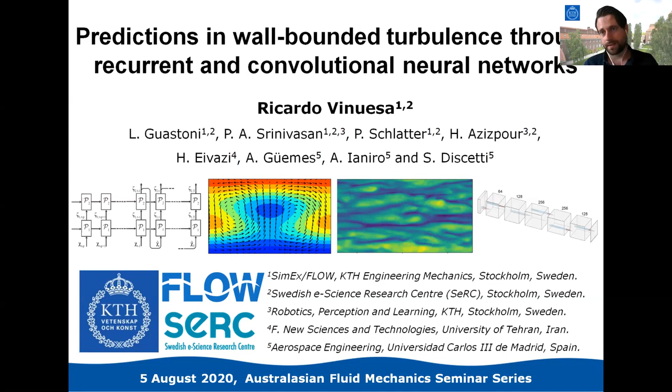I would like to start by acknowledging my many collaborators in this work, in particular Luca Guastoni, a PhD student in our group, who has done a big part of the work I will be presenting today. We also have collaborations with the machine learning group at KTH, with University of Tehran, and with collaborators at Carlos III University in Madrid. This is a collaborative effort, and I will highlight some of the most interesting results to discuss.

The motivation for this work comes from the numerous success stories from machine learning in a wide range of areas. The ImageNet challenge about image classification is quite prominent, where neural networks now have errors of 2% and humans have 5% errors. So we actually make more errors classifying images than neural networks do. Predictive text, finance - there are many applications where machine learning is really helping a lot.

I like this example of one of the first cases where a machine was competing against a human in a task - when the IBM Deep Blue supercomputer defeated the world champion of chess, Garry Kasparov, in 1997. It was really a big accomplishment at the time, and the media captured the importance of the moment. But it turns out it's reasonably easy for a machine to play chess, because chess doesn't have so many options in the end. With some brute force computing, Deep Blue could evaluate a subset of possible moves and select the most adequate ones, and without a sophisticated approach, could defeat Kasparov.

It turns out there are other games like Go, which has recently become very popular thanks to DeepMind, that are significantly more complicated than chess. In Go, if you look at the possible number of moves in a turn, there are many more possible moves, and the typical number of turns a game takes is also much longer. You can define the complexity of a game by the number of moves raised to the power of the turns, and you can see that Go is significantly more complex than chess. So one cannot just evaluate a number of possibilities and pick the best - to play Go, you need some sort of strategic thinking, or intuition about the best way to play.

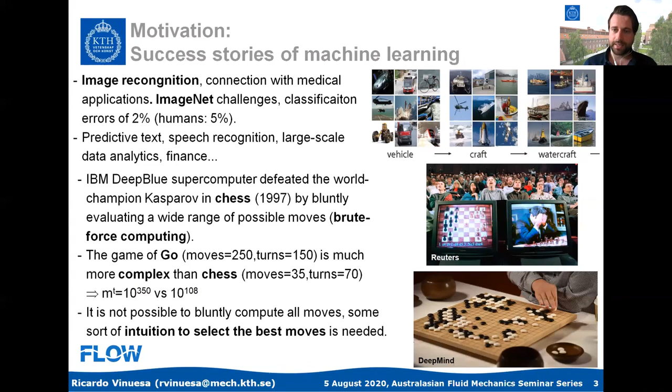This is why this game captured the attention of DeepMind, and they worked on developing different ways of playing Go. They started with an algorithm called AlphaGo, where they showed games of the best human players to this neural network-based algorithm, and it learned from them, becoming extremely good at playing Go - to the point that it was able to defeat Lee Sedol, the world champion of Go, 4-1.

So it really was able to defeat the best human in a game that is actually much more complicated than chess. And then the next level is what they did in this algorithm AlphaGo Zero, where they removed any human knowledge from the table. So essentially they gave this neural network-based algorithm just the games, the rules of the game of Go, and allowed it to play against itself.

It self-improved through playing, just knowing the rules of the game, through reinforcement learning. What's interesting is that in this figure you can see the performance of this network as a function of training time. This horizontal line is the performance of the previous AlphaGo algorithm, and in less than two days, AlphaGo Zero reached superhuman performance. So in less than two days of training, this algorithm, based on knowledge it developed itself with no human input at all, was able to achieve superhuman performance. That was quite an accomplishment as well.

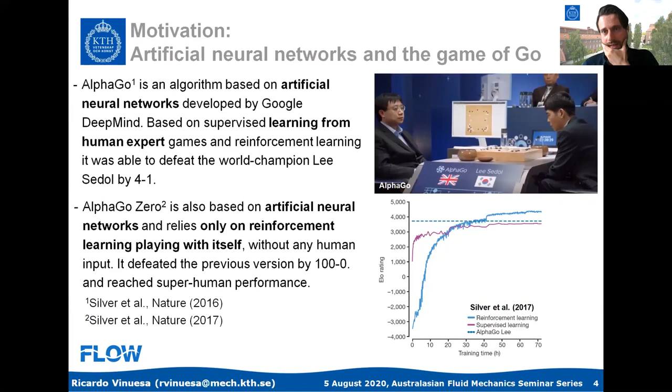We have also looked at a wider range of applications where machine learning or AI, which I will use indistinguishably in this talk, can help. We have a recent review in Nature Communications which you can see here for more details. We looked at the 17 Sustainable Development Goals from the United Nations, and we looked for published evidence on how AI could impact positively or negatively each of these goals, which are also split into 169 targets — going from sustainable cities to climate change to no poverty, all these sustainability targets for the 2030 agenda. What we found is that 79% of the targets could be positively affected by AI, and only 35% could be negatively affected. So in principle there is a quite positive impact of AI on a wide range of applications. Of course one needs to be careful also with the negative ones, but it seems there are many areas where AI can really help.

Now going to our topic today, machine learning applied to fluid mechanics. There are many areas where the feasibility and potential of AI has been assessed in fluid mechanics, starting with a seminal paper by Milano and Koumoutsakos, who used neural networks to model the near-wall region of turbulent channels. This was almost 20 years ago. More recently there has been an exponential increase of machine learning papers looking at fluid mechanics applications.

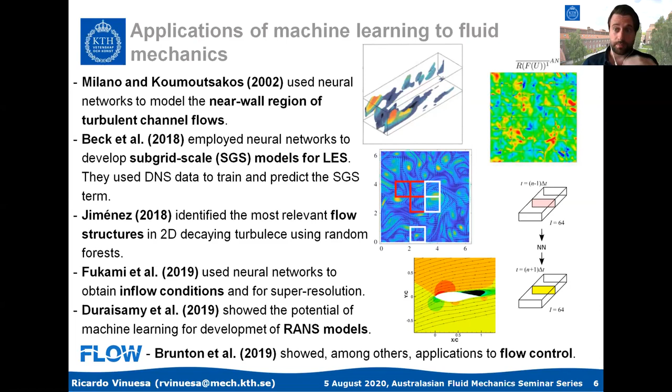So there are many areas within fluid mechanics where machine learning can help, and that's what motivated us to look at what could be done in the context of turbulence. We looked at two main sections, so I'm going to split today's talk into two parts. First we'll focus on temporal predictions, how to advance the flow in time using neural networks, and for that we'll use mostly recurrent neural networks. In the second part I'll talk about spatial predictions, basically non-intrusive sensing, using convolutional neural networks. Let me start with the first part.

This is about temporal predictions, and to do that we start with a simple model of the near-wall cycle of turbulence. This model, developed by Moehlis and others, is basically nine spatial modes that are combined to build the instantaneous flow field. The point is that we need to be able to predict and understand the evolution of the temporal coefficients of these spatial modes. This is a sinusoidally forced flow, so the laminar profile is a sine function, and the different modes represent the streaks, the streamwise vortices, their instabilities and coupling.

Because this is a very cheap model, a system of ODEs, we can produce a lot of data for training, testing, and validating. We produce over 10,000 data sets of 4,000 time units each, using the approach described by Kim. We perturb the fourth coefficient in order to vary the initial condition and produce a sufficiently complete set of conditions, and we only consider data sets that were fully turbulent in the whole range.

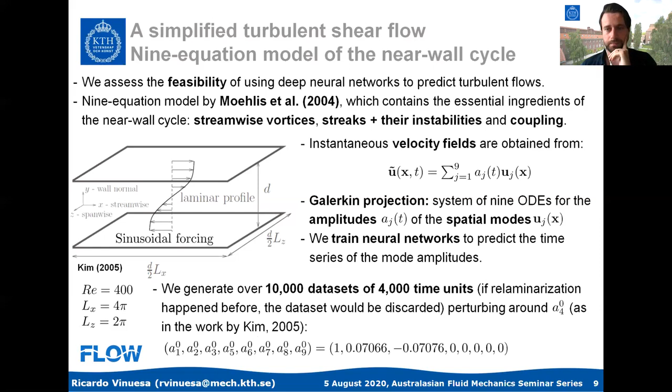So we don't look at relaminarization, we just focus on the turbulence. And this is an idea of how the flow looks like.

All the details of this study are found in this work by Srinivasan and others. This was in Physical Review of Fluids last year, so everything can be checked in more detail here.

What I'm showing is a sample evolution of the 9 temporal coefficients. What you can see is that at some point in this series, the flow relaminarizes. That means A1 goes to 1 and the other coefficients go to 0. We would not consider this series for the training, we would only consider a series that is fully turbulent.

But what you can see in the turbulent region is that the flow looks like it has the elements of the near wall cycle. So you have the streamwise vortices, the streaks, you have the spanwise variation of those streaks. So in principle, this is a model that can help us reproduce some of the behavior in the near wall cycle of turbulence.

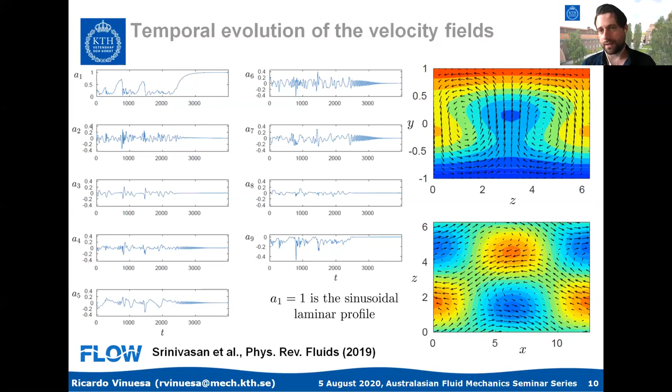And to perform the predictions, we start with the easiest type of neural network. This is the so-called multi-layer perceptron, the MLP, which is a neural network that is fully connected in all the layers. The interesting thing of this network is that it does only point predictions. It does not take into account any temporal dynamics in the data, and is the baseline performance basically.

So when one is looking at machine learning models, the MLP is the basic level of performance that one can achieve, and then any modifications on top of that give you the level of improvement that one can get, essentially.

So this is how an MLP looks like. On the left, you have the input vector, this is the data that you use to perform the predictions. In the middle, you have L hidden layers, which contain the coefficients to perform the predictions we want to do. The output vector is here on the right, which in our case has dimension M equal to 9, because we're predicting 9 coefficients.

The dimension of the input depends on how many steps we take for the predictions. So if we take P previous steps, then the dimension of the input will be 9P, the 9 coefficients multiplied by the number of steps. So usually this input vector will be much larger than the output.

And if now we zoom in a little bit into these neurons to see what's inside, what we see is that in the end, this is just a matrix vector multiplication plus some non-linearity. This matrix vector multiplication, the array that results in this layer, is just the result of multiplying all the weights, which is a matrix, by the input plus the biases. So it all boils down to fitting or adjusting the values of the weight matrices and the biases.

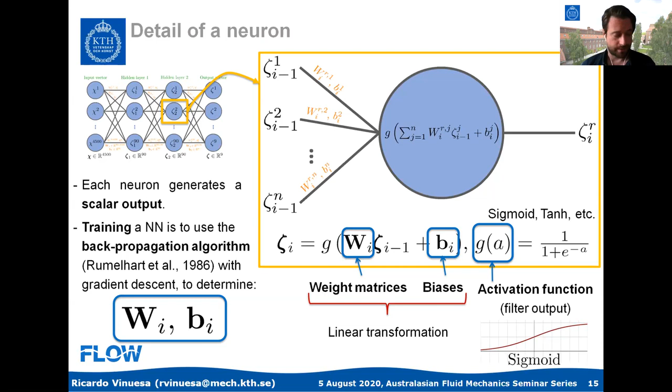So a little bit about training. Typically what we do is split the training data set, so we get 80% for training and 20% for validation. What is training and what is validation?

That's how well you are predicting data that you have not seen during the training. Typically this is going to be larger because you're not going to fit so well the data that you have not seen, but if everything goes well, this should be decreasing as well, because the more you train, the better you're able to generalize the training information.

What can happen is that the training loss goes down, but the validation loss goes up at some point. This is called overfitting, which means you are fitting too well the data you are given, but you're not able to generalize. That means you need more training data so the network can see a wider variety of cases and generalize better.

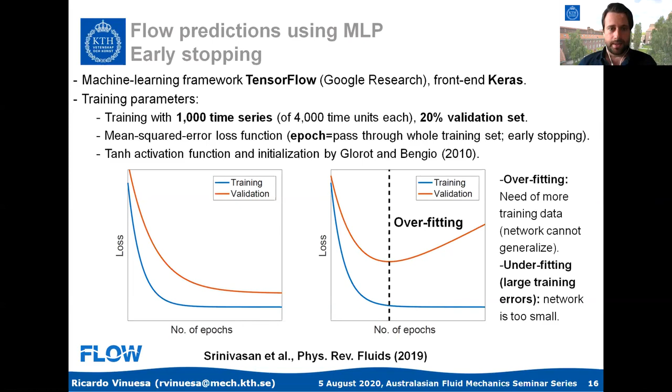This very first prediction performed with the MLP gives us an idea of how much one needs to actually get results. We consider a network with 3 hidden layers and 90 neurons per layer. Keep in mind that the MLP, as I mentioned at the beginning, does point predictions, so it does not know how the data is organized in time. We're using P equals 500 previous steps to perform the prediction of one single step.

Because I have 9 coefficients, I'm using 4,500 data points to only predict 9. This is because this network does not know how the data is organized in time - it just knows that you have many points to predict the next one. So that gives us an idea of how this doesn't seem very efficient. You should incorporate the information of the time dynamics, and that will come later.

But even without knowing about the temporal dynamics, the instantaneous flow field looks more or less like what you get in the reference. It seems that the span-wise movement of the streaks is perhaps not as close as what you had in the reference, but the flow kind of looks a bit like what it should.

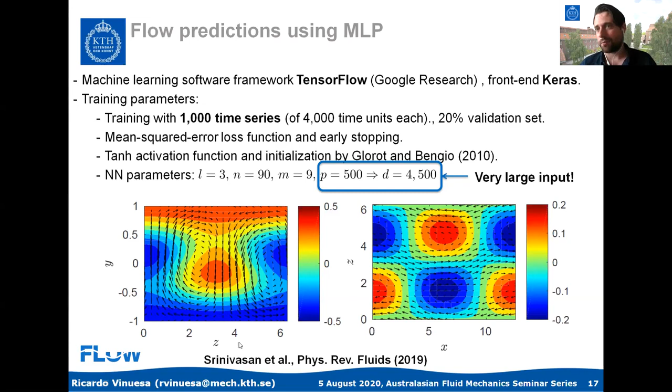If one looks at the turbulence statistics - the mean velocity profile, the fluctuations, and the Reynolds shear stress - you find quite good agreement with the mean, but significant deviations in the Reynolds shear stress. You get 36% error in the fluctuations and in the shear stress. So clearly there is room for improvement in this type of prediction.

What we did was play a little bit with the architecture of the network. We consider a much bigger network here, with 5 hidden layers and also 90 neurons per layer. And we can see that we can improve.

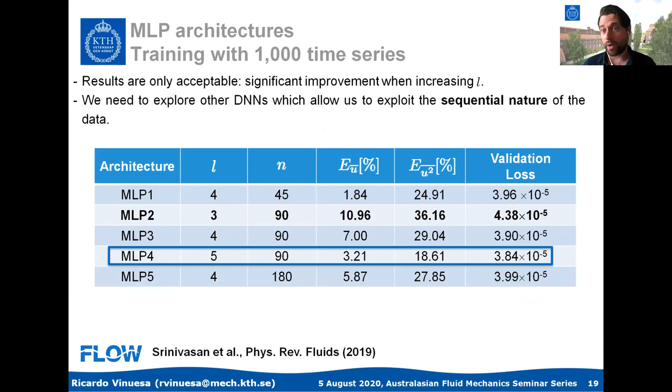This would be the error in the mean, and this would be the error in the fluctuations. We can improve the error in the mean, but we still have quite large errors in the fluctuations - 20% error. This gives us an idea of how far one can go with MLPs. We can get decent predictions, but we're still quite far from getting very good agreement with the reference.

The next level of sophistication would be what is called the recurrent neural network. This is a network that essentially incorporates the temporal dependencies in the input data, and that allows us to understand a little bit how the data is organized. This is a schematic representation of an RNN, a recurrent neural network, all described in the proceedings paper by Guastoni and others.

And what you see on the bottom is the input vector, the input data that we're having. And here on the top, I'm having the output of this current step. You can see that because of how the data is organized, the temporal dependencies are taken care of.

How are they accounted for? The key is what you see here. There is a recurrent connection in this particular place, which gives us the information of how the temporal dynamics are being accounted for. So if we look at this particular neuron, we see from the bottom we get the input of the current step, and from the side you get the information from the same layer at the previous step. So this recurrent connection is what will allow us to get a very good representation of these temporal sequences. You get present information and past information as well.

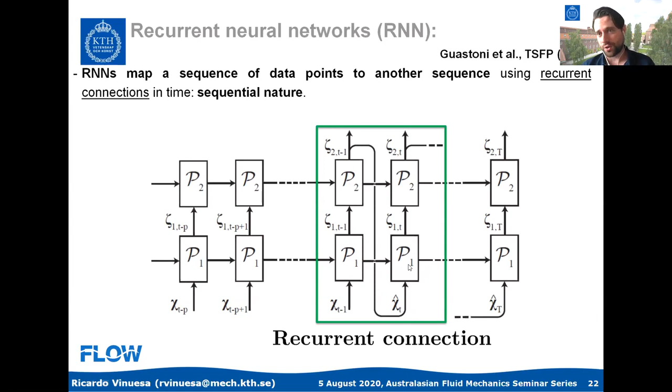Turns out that if we zoom into this neuron from the recurrent neural network, it's quite difficult to train recurrent neural networks because very quickly you get the problem of vanishing gradients. Basically your gradients go very close to zero, and then there is no possibility to train anymore.

One quite popular solution to the vanishing gradients problem is what is called the LSTM network, long short-term memory network, which is very famous because it's widely used in speech recognition, in text, the autocomplete features of your phone use LSTM networks. So if you're getting the wrong word when you're writing a text, then you need to train your network more, right? It's not getting the word that you're thinking.

It is all based on the training data and on how the temporal dependencies of that data are being constructed. So the autocomplete is trying to predict what is the next word that you're going to write. Without going too much into details, if you're interested, we can discuss it a bit more later.

This LSTM network has a quite sophisticated gating mechanism. What does that mean? Through these gates, forget gate, input gate, output gate, it tries to understand how important is the past information and how important is the present information. Through this sequence, it is giving a certain weight to the old information and a certain weight to the information that comes from this current step.

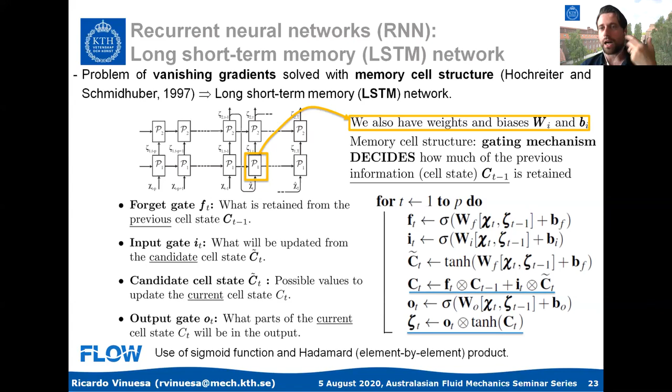By doing that, it can exploit the temporal dependencies in the data, and it can learn from those dependencies how the data is structured in time. In the end, we're also training weights and biases, so you can see different weights and biases in all these different gates. But what we are doing is a very similar thing, just organizing the data in time, so the network knows this input comes after this one, and this is the other input from the next step. Then it can really understand how the data is organized in time.

What we do first is an exploration of the architecture of this network. We change the number of layers, we change the length of the sequences that we are predicting. Here I'm showing the results, and I'm going to walk you through how it performs.

In the end, the idea is that with a much smaller input, here we only use 10 previous steps, we can get very good results. Remember that before we needed 500 steps to make one prediction, and now we only need 10 steps, because by knowing how the data is organized in time, you don't need so much input information to get a good prediction.

So if we compare this LSTM1 architecture, it has only one hidden layer. What I'm showing here is how much training data I use. If I compare the results with 1,000 training data sets, the same that I had for the MLP, we can see that we can reduce the error in the fluctuations from 20% down to 3%. So we can really improve significantly.

And if we increase the amount of training data from 1,000 to 10,000, then we can further reduce the errors. We can actually get errors in the mean of 0.5% and errors in the fluctuations of 2.5%, which is actually quite good. By adding a second hidden layer, we can further improve the predictions.

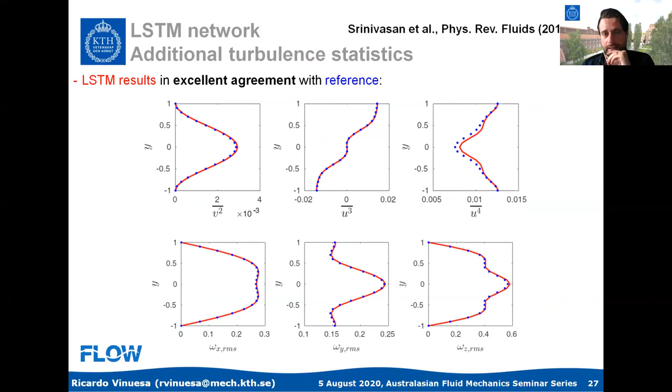Interestingly, if we go to even more complicated statistics, we also see that the higher order terms, the skewness and flatness, are in excellent agreement, and the vorticity fluctuations are very well predicted. So we can predict extremely well the turbulence statistics of this temporally evolving system. Again, this is not canonical turbulence, just a low order model of the near-wall cycle, but the temporal dynamics is in principle quite well represented.

This is because this near-wall model is a chaotic system. Of course, the network predicts the flow very well, but it's not exact. It has a small error, and that small error is sufficient to shift the prediction to another trajectory, so you're not getting the same prediction.

On the other hand, we are currently developing some work in the context of the Koopman operator to improve the short-term predictions. There are ways of keeping that short-term prediction better for longer, but of course any small error will eventually push you to another trajectory.

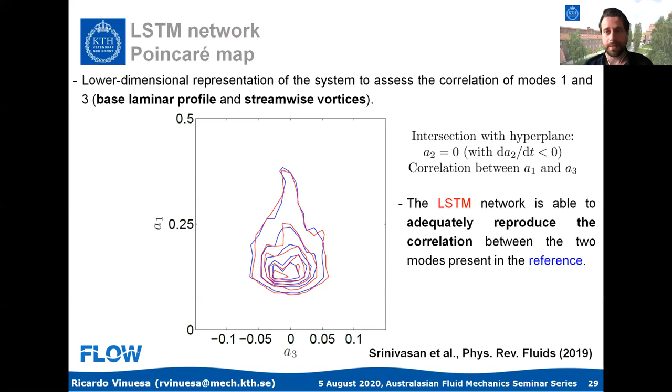But LSTM networks are a valid possibility and a quite robust possibility to predict the temporal dynamics of these, in principle simplified, although quite realistic, turbulent flows, basically.

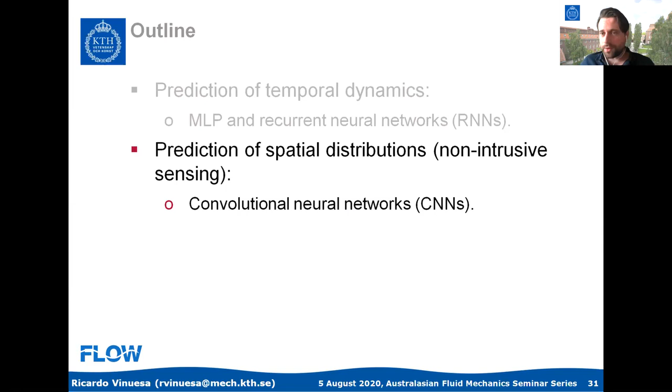To do that, we're going to use what is called convolutional neural networks. Let me explain a little bit more why this is a good choice to use this type of network.

This type of problem, measuring at the wall for example and predicting the flow farther away from it, has been investigated before by Suzuki and Hasegawa and by Encinar and others, through linear methods, basically linear stochastic estimation. So you establish a linear relationship between the quantity measured at the wall and the quantity that we want to predict.

More recently, we have a paper in JFM, Sasaki and others, where we looked at transfer functions, basically convolutions, where we consider both linear and non-linear transfer functions, and we saw that the non-linear ones perform better. So what you see here is the streamwise velocity fluctuations at y plus 15 in a turbulent boundary layer.

And here is the linear prediction. You can see that the linear prediction attenuates the fluctuations in some places, and in other regions it overestimates the fluctuations. So clearly there is something missing if you just do only a linear prediction.

As we know, scale interactions in turbulence have a linear component, which has to do with the superposition of the larger scales on the flow closer to the wall. But there is also a nonlinear component, which is the modulation. And if you have a linear prediction method, then you're going to miss all the nonlinear interactions.

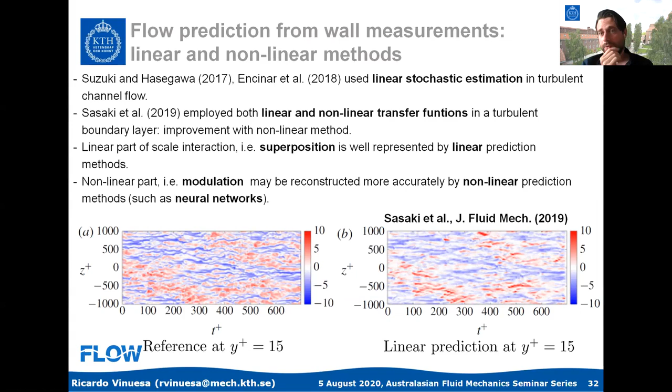So in principle, it is reasonable to think that a nonlinear method will perform better. And as I mentioned in the first part of the seminar, neural networks are able to introduce nonlinearity in the predictions through this activation function. So, given that we have enough training data, we can perform nonlinear predictions by using neural networks.

And we're going to consider this example: a turbulent open channel flow. The reason why we chose an open channel is because in a full channel, you have interactions of the larger scales from one wall on another, as shown by Lozano Duran and Jimenez, and we want to simplify the dynamics a little bit.

So if we only have one wall and then a symmetry condition on the top, then in principle we don't have that interaction between walls. So that's a little bit simpler for our network to learn.

We consider the Fourier-Chebyshev code SIMSON developed at KTH to perform DNS, direct numerical simulation. Here I'm going to start with a friction Reynolds number of 180, but later I will show you results at 550, and I will also show you results in a bigger domain. This is the first assessment.

All the details of this are in this proceedings paper by Guastoni and others. This was developed in the summer workshop in Madrid by Jimenez, and then it was later developed a bit more to include more cases. So all the details are in this conference proceeding.

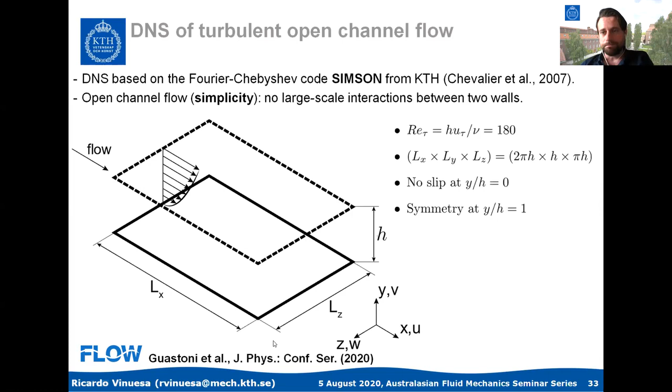So first, let me briefly explain why we think that convolutional networks are suitable for this problem. The first half of the seminar was based on fully connected layers, networks where each neuron in one layer has a connection with all the neurons in the next one, and it's easy to see that that gives us a lot of parameters to train.

All of these connections have a weight and a bias term, and images well, images are pixels, right? That's a lot. If you start to have high resolution images, you have a lot of data. And if you start to have many layers, then the amount of parameters increases exponentially.

So that's not feasible. Fully connected networks for computer vision are usually not a good idea, at least fully connected layers all the way. Some connected layers can help at the end, but in principle, having all the layers fully connected will be problematic if we consider computer vision problems.

On the other hand, there is a tool that has received quite some attention recently, which is the use of convolutional layers. These convolutional layers are based on what is called a kernel.

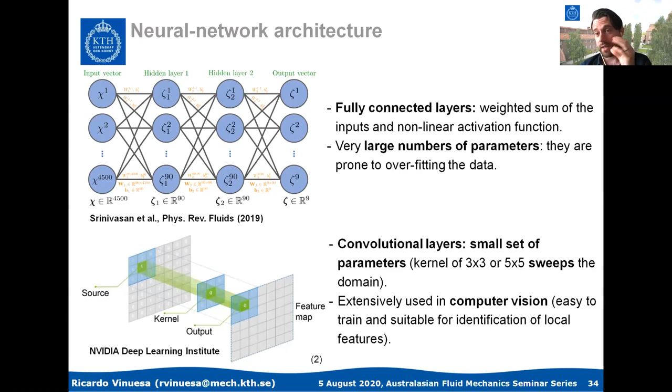This is a 2D window that can be 3 by 3 or 5 by 5, and this little window sweeps through the image. As I'll explain, all the information from this window results in one data point in the output. This produces significantly fewer parameters than a fully connected layer, and it's a quite suitable tool for analyzing the structures of images. So convolutional networks are extremely popular in computer vision because they're cheaper and easier to train, but they also perform better.

I'm going to understand a little bit what these convolutions are doing. I'll discuss very briefly something that's probably basic for most of you, just to quickly look at convolutions in image processing. So essentially, how does this work? What is this convolution operation?

If you have an original, starting image F, which is a set of pixels, a black and white image with only one input channel, one defines a convolution filter, or kernel first, because the 2D function is a kernel. When we get more kernels stacked on top of each other, then we get a filter. And the result of the convolution is what is called the filtered image.

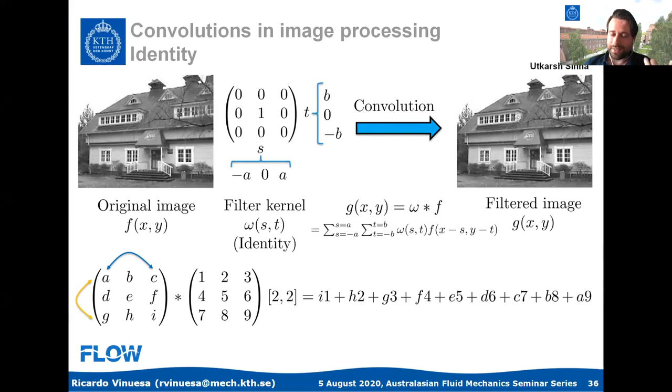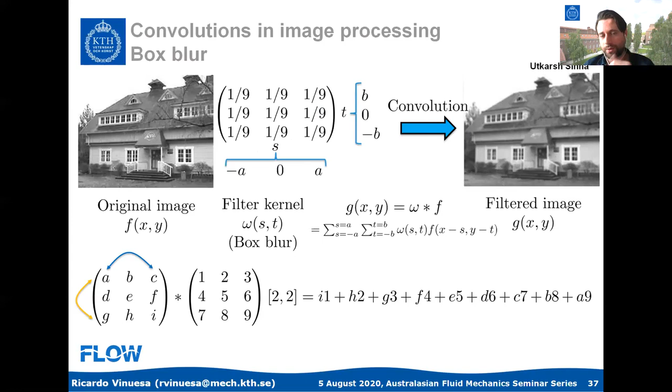So it could be that the convolutional network is picking up edges, picking up blobs of high fluctuation, picking up streaky structures - clearly things that are found in turbulent flows. So those spatial features identified in images is exactly what we're able to pick up when looking at the fields in turbulence.

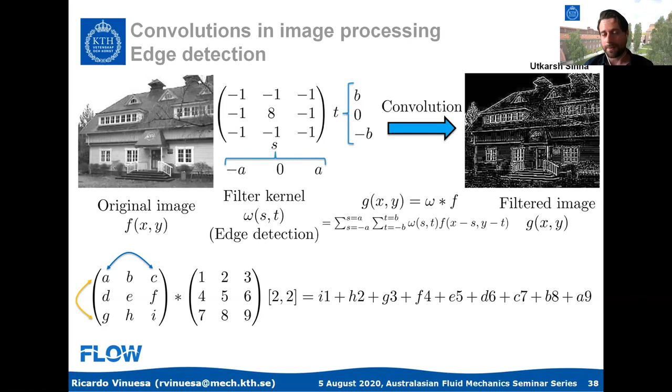If one applies the 2D kernels on 3 input channels, one obtains what is called a filter, and a filter of 3 by 5 by 5 would be applied to this input as follows: I apply the first kernel to the first input channel, the second one to the second channel, the third one to the third channel, and then add everything up at the end. So it's very easy to apply filters when you have multiple input channels.

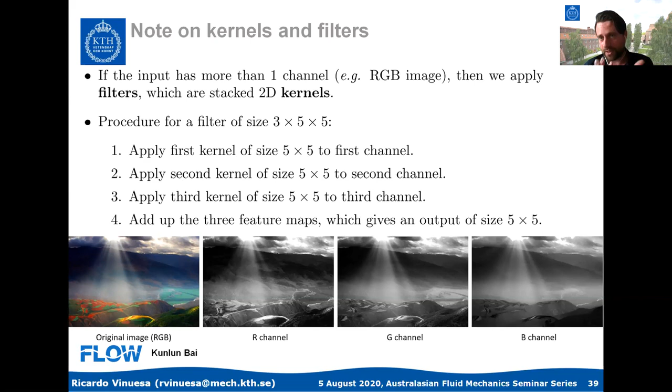The reason I'm doing that is that when I go to turbulence, it will be interesting to have several input channels, not only one piece of information to predict, but more than one piece of information.

Now, enough about images, let's go back to turbulence. What are we trying to do? We're using quantities measured at the wall, in this case the streamwise and spanwise wall shear stress components, so we have 2 input channels. We're going to predict, farther from the wall, the streamwise velocity fluctuations at the same instant. So we're using information from the wall to predict information far away from the wall.

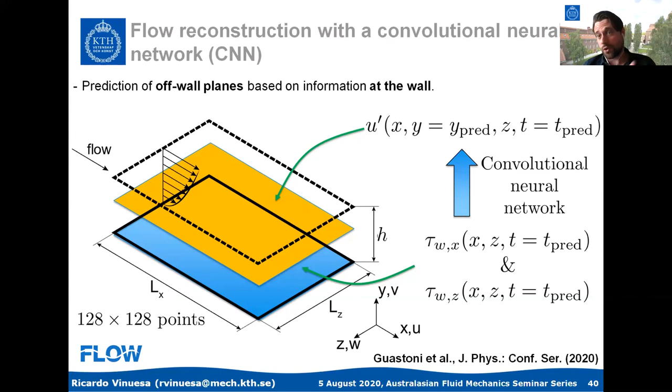Because we have 2 input channels, we have to account for this procedure when you have multiple input channels. All the information about this network and how everything is designed is described in these proceedings, so you can get all the information there.

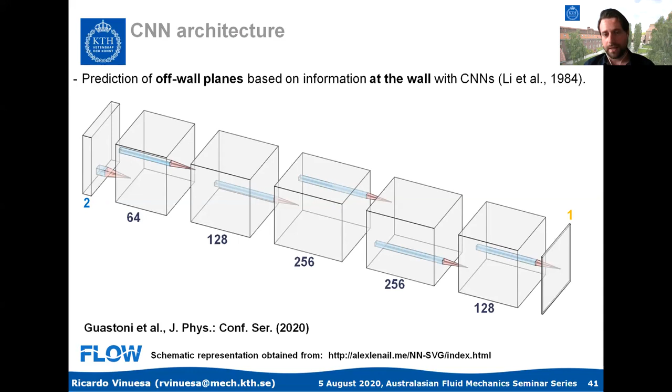This is the schematic representation of our convolutional network, made up of different convolution operations. We start on the left with the input layer that has a depth of 2, since I'm using 2 wall shear stress components, so that's 2 channels. The output on the right has a depth of 1, because I'm predicting only one field, the streamwise velocity fluctuation field. In the middle we have what are called the convolutional layers.

I'm considering as an activation function the ReLU, the rectified linear unit, which is a very simple activation function but very powerful in computer vision. And I'm having an input of 128 square points, which is the resolution of the plane that I'm considering.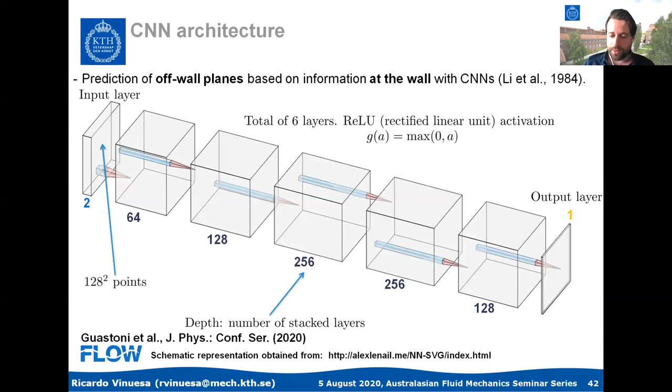So how does this work? In practice, in my first layer I have a filter of size 2 times 5 times 5, so the 2D window would be 5 by 5, meaning we have 25 points to produce the output of 1 point, and that gives me only 50 parameters.

To give you some perspective, if I would do this with a fully connected network, I would need 128 squared times 2, so more than 32,000 parameters. So you can really see there is a huge decrease in the amount of parameters, and why this is helpful for computer vision.

When I apply this filter, I apply it a total of 64 times, stacking all the feature maps, so I get 64 planes with features. What is a feature? It can be an edge, a certain characteristic of the image that has been picked up by the filter.

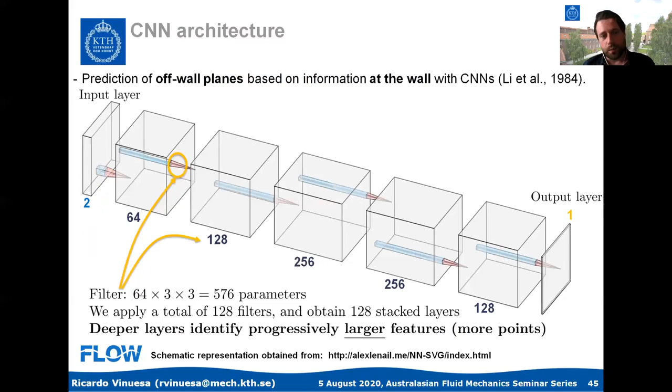What's interesting is that as I go deeper into the network, those features get combined into larger things. The first layers look at local information, very small things, but as you go deeper into the network, the outputs receive information from more and more points.

So they're building up towards larger structures as you go deeper. This is quite cool, because there's a hierarchical distribution of those features, which is something we observe in turbulence all the time, that hierarchical setup of the scales being identified. This is why convolutional networks are helpful in image processing and computer vision, because we're able to exploit the hierarchical structure of the data with far fewer parameters.

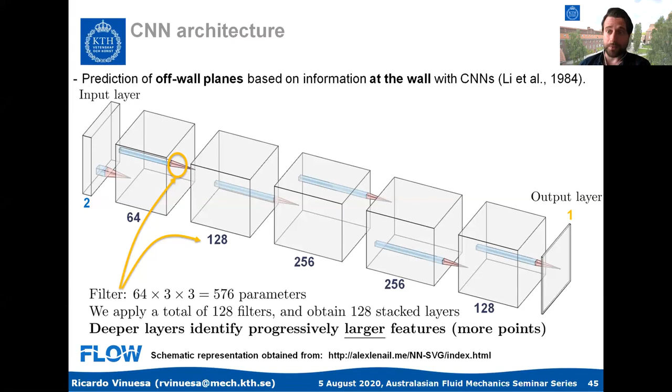This is what I mentioned at the beginning. You can have, at the end, a fully connected layer, so you get a global output, for example telling you this is a car. But you can also have fully convolutional layers all the way, which means at the end I don't get one single output like 'this is a car' or 'this is a cat.' Instead I get a field identifying what is a car, what is a cat, what is the road, and so on. This is obtained when we have fully convolutional layers all the way.

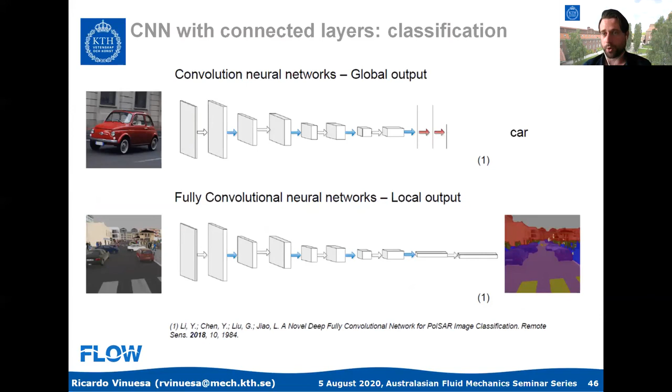And this is the approach we're going to take here, because we want our output to be another field, like the input.

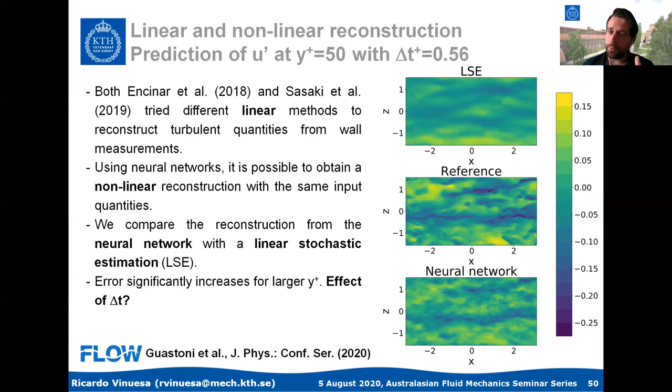The predictions are not as good, of course, because the data is less correlated. One way to improve the results far from the wall is to increase the time step between samples. Farther away from the wall, the scales are much slower, so the samples are more correlated and you get less information from them. By increasing the time step between samples, we effectively get more information, and you can see that the validation loss is lower and the field is in better agreement with the reference.

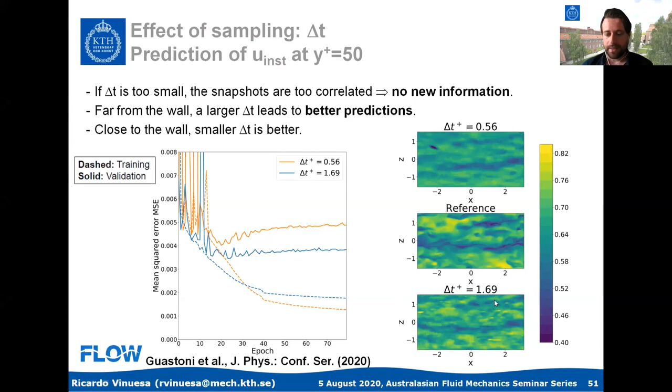Looking at the turbulence statistics, the orange triangles show the mean flow and streamwise velocity fluctuations. Close to the wall, the agreement is excellent, and as we move farther from the wall, we start to see higher deviations from the data. If we increase the time step between samples, we don't see a difference close to the wall, but far away we improve because we have less correlated samples, giving us more information to train our network. The linear stochastic estimation, the linear prediction, is the worst, because it only captures linear interactions between input and output.

Looking at the percentage errors, at the near wall peak we get less than 3% error with the network and 12% error with the LSE. Farther from the wall, we get 30% error with the network. This is something we've been able to improve a bit more in our more recent study.

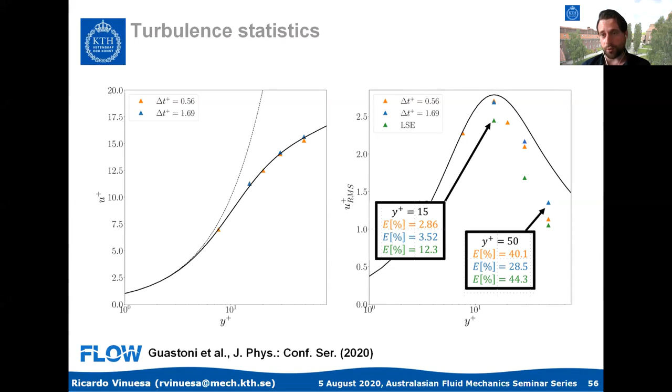Let me dive into it. We have now extended this work to a friction Reynolds number of 550. We have increased the amount of inputs, now also considering the pressure. So we consider the two wall shear stress components and the pressure as inputs, and the output is the three velocity fluctuations, not just the streamwise component.

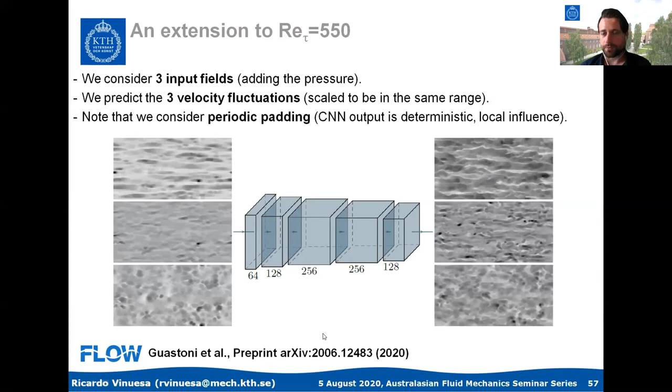We scale the inputs so they are in the same range, and we also apply periodic padding to the input so we can exploit the periodicity in the underlying training data. By the way, all of this is available in a recent preprint by Guastoni and others, where all the details of our setup are discussed. Feel free to reach out if you're interested in that.

In this work, we introduce another approach, also discussed in a paper in Physics of Fluids by Güemes and others: instead of predicting just the flow, we perform a proper orthogonal decomposition, POD, and then predict the temporal coefficients of the POD modes. By doing this, we encode some of the physical behavior of the flow through the POD modes, and then we only need to predict the temporal dynamics. This is similar to what we did at the beginning with the Moehlis model.

Here you see how we do it. We take the domain, decompose it into smaller subdomains, and perform the POD in each of these squares. The reason is that all scales larger than the domain size get lumped into the first POD mode, meaning we can reconstruct the signal with fewer modes. This is less work for our network, since we only need to predict fewer mode coefficients. This is how the data is organized when performing these predictions based on POD modes.

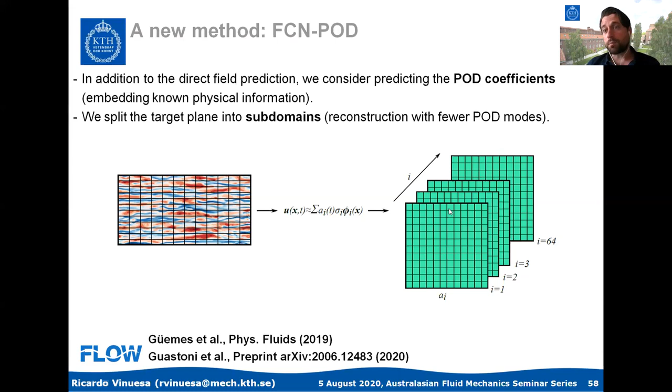So this is a comparison of results, all at a friction Reynolds number of 550. On the third row we have the reference DNS. On the bottom row, the first column is y plus 15, and the second column is y plus 100. The FCN, the fully convolutional network, based on predicting the full field, is in excellent agreement with the data, as before. It gets worse when compared farther away from the wall. But the convolutional network with POD actually performs better when we are farther away from the wall.

Why is that? Well, it kind of makes sense because close to the wall, it is quite easy for the fully convolutional network to just reproduce the full signal. But when you go farther away from it, it is more useful for producing training data to just encapsulate all the spatial distributions into the POD modes and train to learn the temporal dynamics. So the message is: close to the wall, the network that reproduces the whole field performs better.

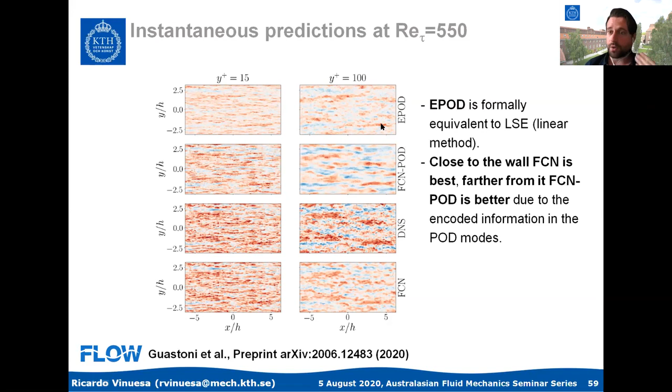Far away from the wall, the network that predicts just the temporal coefficients of the POD modes performs better. And here, as a reference, I'm showing a linear prediction, in this case through extended POD, but that's formally equivalent to linear stochastic estimation, and the results are as before. So basically, we get an attenuation of the fluctuations when we only consider a linear prediction of the flow.

Here I'm showing the predictions of the streamwise velocity fluctuations, as well as the wall-normal and the spanwise. The triangles are the convolutional network, so basically predicting the full signal. The blue circles are the predictions through convolutional network of the POD modes, and the green squares are the linear prediction. So what we can see is actually consistent with what we saw before: the extended POD, the linear method, performs worse.

Far away from the wall, all the methods start to exhibit discrepancies. And what we see here is that in the case that is farthest from the wall, the network based on POD is a bit better than the one based on the fully convolutional network.

And you can see here the error levels. We actually get quite good predictions. Close to the near wall peak, we make less than 1% error in its prediction, so it's essentially very well predicted. Far away from the wall, at y plus 100, we actually get only 26% error in the streamwise velocity fluctuations, which is a quite good accomplishment, keeping in mind that we're very far away from the wall.

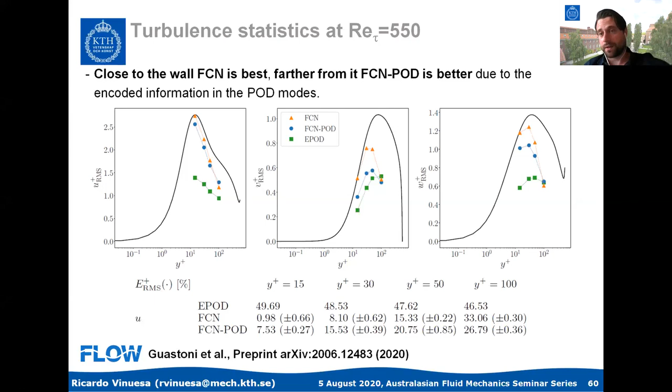And then just to conclude, I would like to briefly mention a couple of examples of something that is very trendy in machine learning, which is transfer learning. I think that there is quite some potential in this approach. It's basically the idea of transferring the knowledge learned by one network to another one, so we don't have to redo the training all again. And of course, in the context of efficiency and code development in a practical way, this is very practical.

So if we first look at the 180 case, what I'm showing is that it is possible to freeze the 3 first layers from the network trained to predict at y plus 15. And if we want to use this same network to predict at y plus 50, so farther away, I only train the 3 last layers. So basically, I freeze the first layers, the ones that are looking at smaller features, and the layers later on, the ones that look at larger features, those are left free.

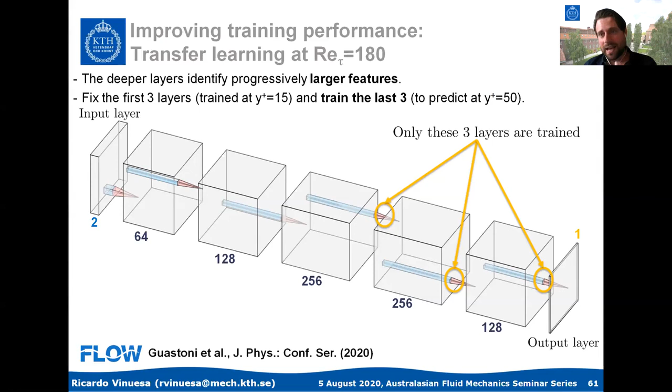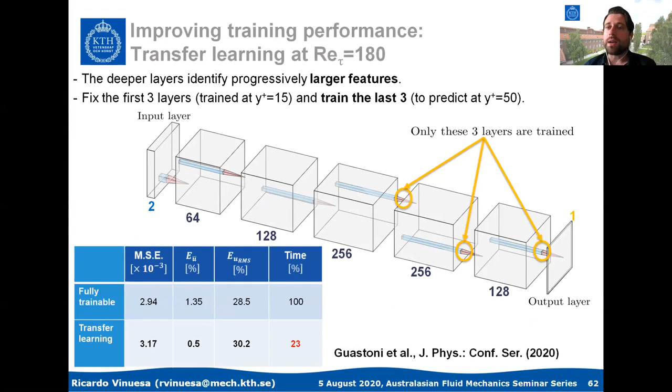And of course, that kind of makes sense because I would expect the smaller scales to be more or less similar at 15 and 50 plus units, and of course the larger scales to be different. So I can exploit what I learned at y plus 15, and I don't need to learn it again for y plus 50. The results show that we get very similar results in terms of mean flow and fluctuations, and we save more than a factor of 3 in terms of training time, in terms of computer time. So actually, this really helps me to transfer the knowledge and train more efficiently the network at y plus 50.

And this, I would say, is maybe the most remarkable result: we are able to transfer the knowledge learned at 180 to 550. This is, of course, only one example of how to do this transfer learning. There are many applications, and we're looking at some of them right now, of how this can be done, but it's actually something quite promising.

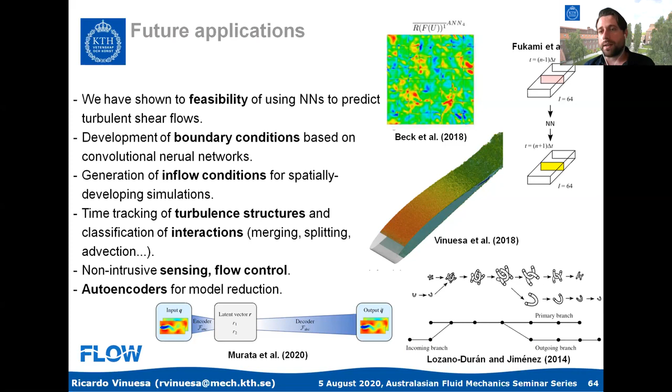And then an area which has received some attention recently in the group of Koji Fukagata is the use of autoencoders for model reduction. I really think this type of application will see a lot of potential in the coming years, basically performing nonlinear modal decompositions through autoencoders, which are showing quite interesting applications.

And with that, this is a summary of my conclusions and results, and some areas for improvement. I would like to thank you very much for your attention, and we have some minutes left for taking your questions. Thank you.

Thank you very much, and on behalf of everybody—hopefully everyone's clapping. So some virtual claps from Julio. Yes, it's very easy to confuse the virtual claps of people raising their hand.

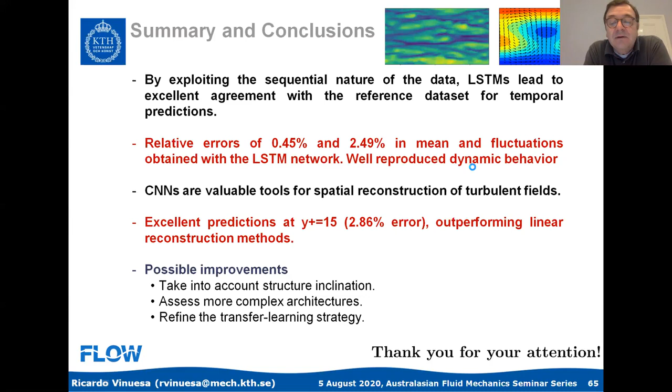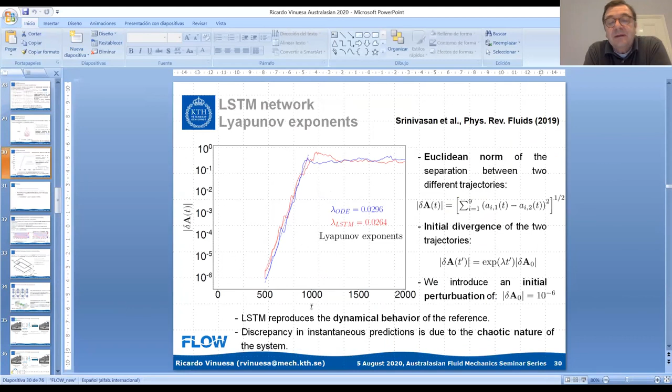It introduces quite a few concepts that are working. If you go to page 30 of your slides, I saw something reminiscent of transition, which is where I want to take you. This reminds me, conceptually, of a very nice prediction of linear behavior, which is a simple thing to do. The trouble is that some of us would argue that transition is much more difficult than turbulence, in the sense that as this principal linear mode grows, other modes will come up non-linearly, and the non-linearity, which modes and how strong they are, will depend on the initial amplitude of the linear mode that grows. So can you comment on the interplay between determinism that we need from the Navier-Stokes operator and this powerful prediction method, in order to make progress there, other than doing n DNSs for each of those scenarios?

Yes, you brought up several interesting points. First, of course, here this is fully turbulent, so I'm not looking at the transition. But as you point out very well, we're looking only at the leading Lyapunov exponent. We haven't looked at the Lyapunov spectrum, which would give additional details of the dynamics that we have not compared. So there is some more things to do there.

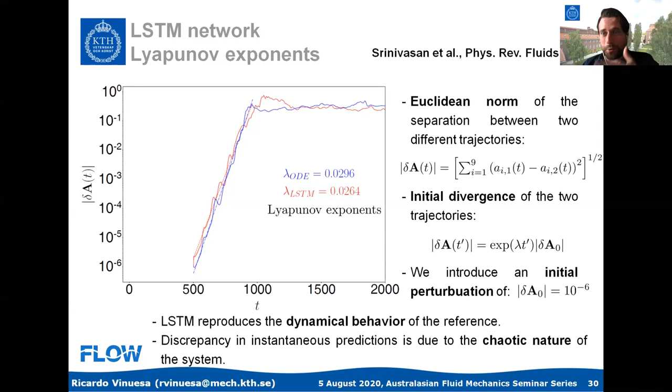And this is only about turbulence. If one goes into transition, well, that's a whole new world also. And that's why on purpose we excluded time series that were relaminarizing, or that were in kind of intermittent states. We only focus on the simpler problem of turbulence.

I have, however, a feeling, from my experience looking at these data-driven methods, that if you know something from the physics, you should use it in your model. You should not allow your model, or use computer time, to let your model learn something that you already know from physics. So as you point out well, things that we know from the Navier-Stokes operator, we should embed in our model. If the flow is incompressible, you should impose the incompressibility, maybe going to a latent space through an autoencoder where we impose the incompressibility. If the flow is periodic, you should allow your network to exploit that periodicity instead of forcing it to learn it. So it's a bit hard to see what new directions in the context of transition would help, but certainly exploiting the things we know from the physics should be added to the networks. We don't have to learn what we already know from the physics.

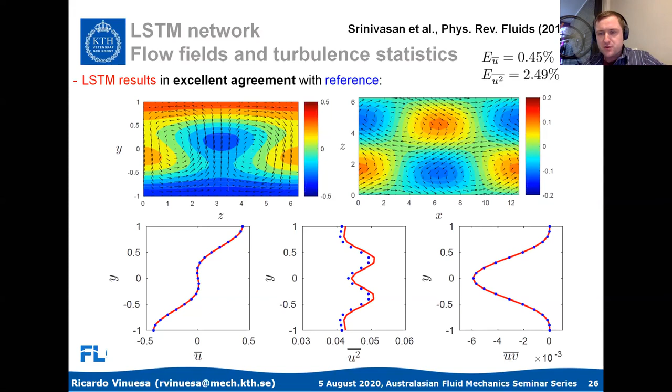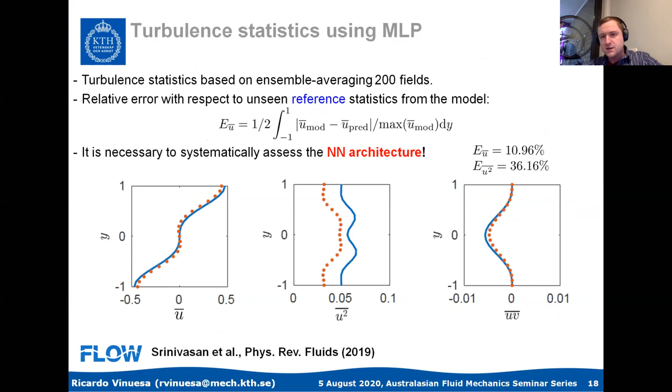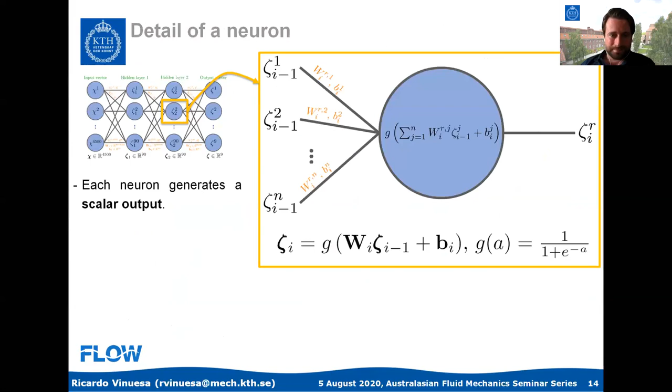Ricardo, you mentioned something about the Koopman operator, and when you were talking about the first neural network, the MLP one, I immediately thought of the Koopman operator, where I guess your input states are not necessarily linear things, but they can be nonlinear things, like U squared, and so on. I'm wondering if you can give a high-level overview of how you see the Koopman operator coming into play for some of these problems.

This is work you can see in detail in this preprint, done by Hamidreza Eivazi in collaboration with us. The idea is that through the Koopman operator you essentially have linear predictions, but it is possible, as was also shown by some work by Brunton and Kutz, to embed nonlinearities as a forcing. So one can add a forcing to the system which includes nonlinear interactions. What we show in this work is that if you introduce second order nonlinearities, the same as in the Moehlis model, you can reconstruct the data pretty well and improve significantly the short-term predictions, because it encapsulates the physical behavior that you have in the original model.

But more interestingly, if you have even higher order nonlinearities—the reference model has second order, but we introduce second, third, and fourth order—then the model picks directly the correct ones. It gives zero coefficients to the higher order nonlinearities and goes directly to the correct ones. So in a way, knowing the underlying physical behavior, and introducing the nonlinearity through a forcing, can really help in the predictions a lot. This is, of course, under investigation and we're trying to learn more, but this type of approach can also help very much.